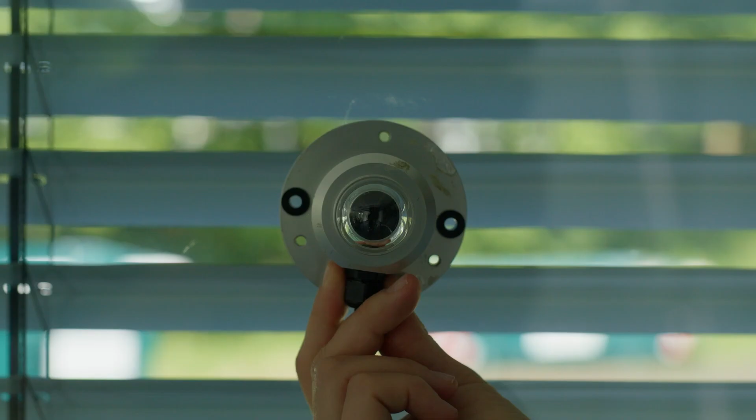Regulation overview. This is lecture I03, regulation overview. It will give an introduction to regulation types and scales of regulation, relevance to facade engineering, and some conclusions.

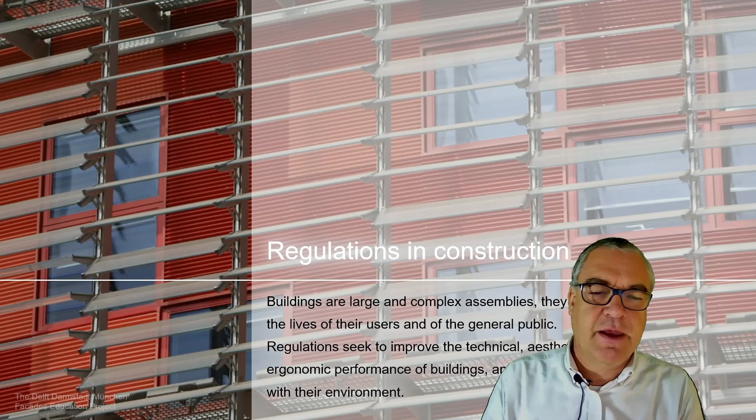Regulations are defined for buildings, which are large and complex assemblies. They shape the lives of their users and the general public. Obviously, they seek to improve the technical, aesthetical, and ergonomic performance of the buildings and their interaction with the environment. We don't want people to die. We don't want buildings that do not function perfectly. We do need to make sure that they're financially feasible and that they make sense energy-wise. And that's why we need regulations.

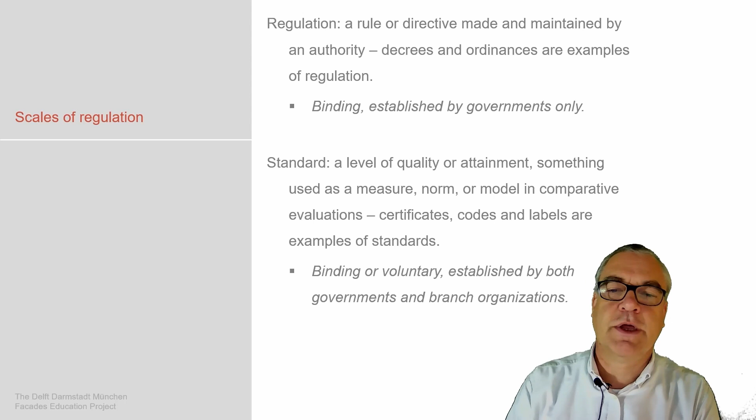These regulations are defined in scales of regulation: regulations, rules, directives made and maintained by authorities, by governments, larger authorities, and then standards, which are more made to measure and norm and organize the quality, which is done in certificates, codes, labels. These are samples for standards, and they're either voluntary or established by governments or branch organizations as a known standard for a structure.

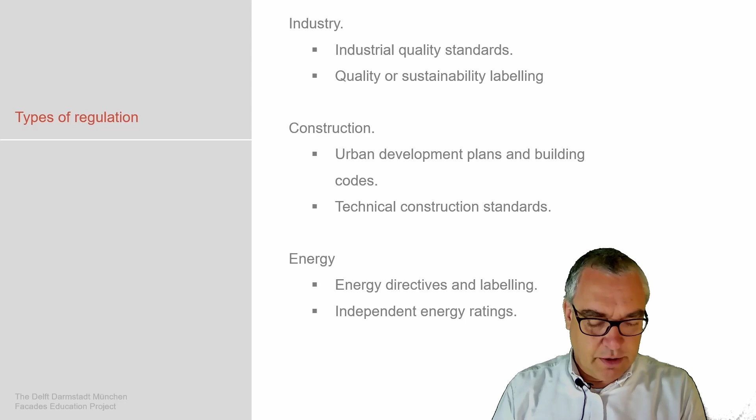We have regulations for industry, like industry quality standards. We have construction definitions like urban development plans, building codes, technical construction standards, and we have energy labeling, energy standards, which are getting important in our built environment. International industry standards like ISO and ASTM establish technical requirements, specify them, and give guidelines to secure qualities of materials, products, processes, services.

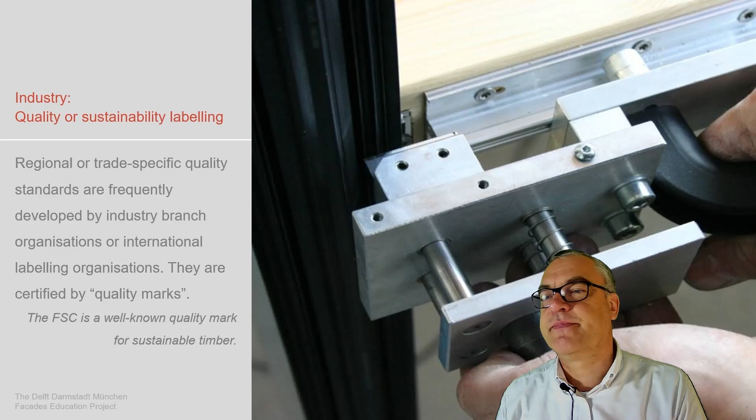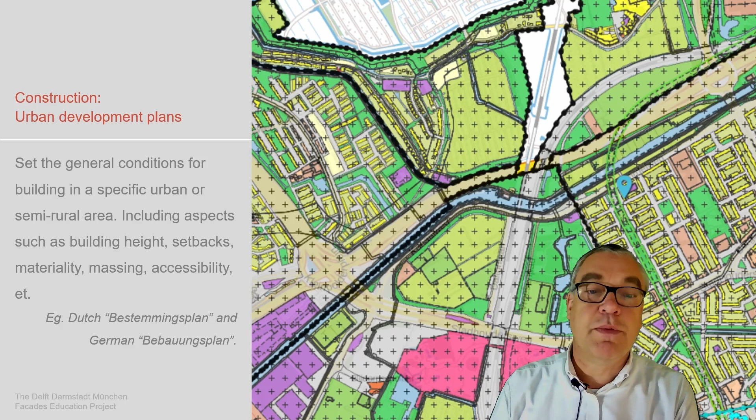Industry quality and sustainability labeling. These are more regional and trade-oriented standards, developed by industry organizations and international labeling organizations. FSC, for example, is a well-known timber trademark standard, and for different materials, services, and product lines these standards exist. Then come the construction definitions, urban development plans, which give a general setup of a certain region, like the Dutch Bestemmingsplan or the German Bebauungsplan. They define what type of building is allowed to function.

Which brings us to the next level, more interesting for facade engineering: the building codes, establishing design and engineering norms for different building typologies, as well as for the interface with other buildings and urban context. They focus on health, safety, and usability. Health in terms of well-being inside, safety in terms of buildings not collapsing, things not falling apart, and usability, the possibility to function. It may be healthy and safe, the building doesn't collapse, but it may vibrate too much, and then you can't use the building. The Dutch Bouwbesluit or the German Bauordnung are sets like this.

Then come the technical details, construction standards, defining the methods for planning construction of building components, for example how to calculate the amount of light or ventilation in rooms. In this drawing taken from Tillmann Klein's PhD, you see all the different DIN norms in this German sample, which give an idea of how to make a construction part of this material, whether the glass, the rubber, or the aluminium profile.

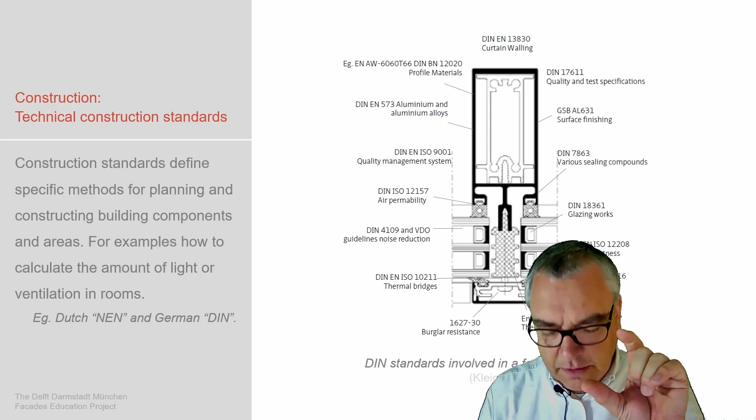The national ones are, for example, the Dutch NEN norms or the German DIN norms, and in the European Union these are being transferred into the Eurocodes, EC norms, which are supposed to take over the national regulations. But as you can imagine, this is a long process, which will take some time to be finalized.

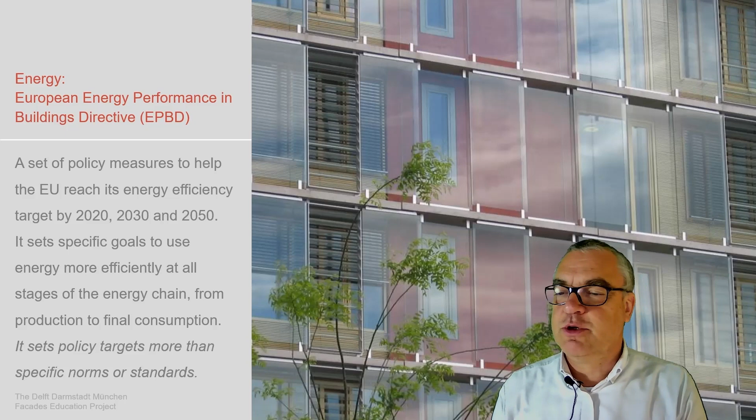Then the energy field: the European Energy Performance of Buildings Directive, the European Union's idea to reach its energy targets by 2020, 2030 and 2050, with an ongoing discussion on this. This defines the global energy goals, which are then transferred into national standards, for example the Energieeinsparverordnung, which is now taken over by the next standard, set up for a certain time. Based on these European norms, national regulations are shaped to reduce the energy impact, and national legislations try to fulfill the European results.

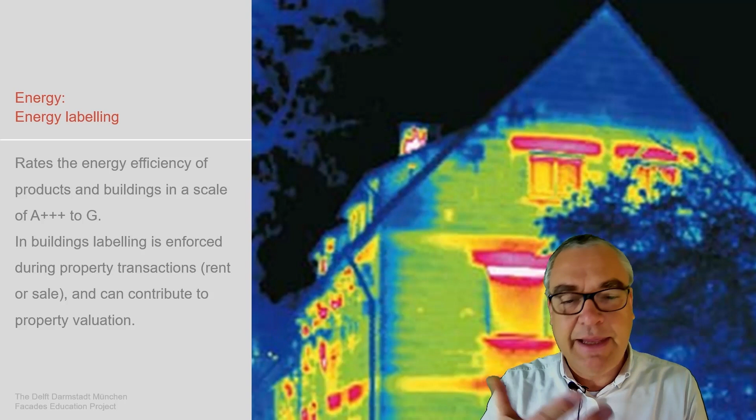Energy labeling is interesting in this aspect. Different products are labeled from A+++ to G, which is very low. Building labeling is enforced during a property transaction, rent or sale. So this is used not only for labeling a product but also the entire building, and it is legally enforced so that people use it, as you are aware if you go through these kinds of processes.

And then there are independent rating agencies, an interesting one as well. Samples are LEED, BREEAM, or DGNB as the German set, and these are voluntary. They're not legally enforced, so you either follow them or you don't, and by that you get certificates which define the energy quality or the global building quality of your building.

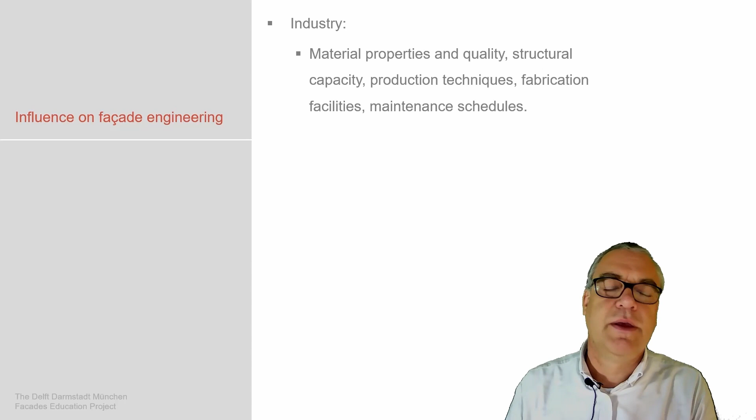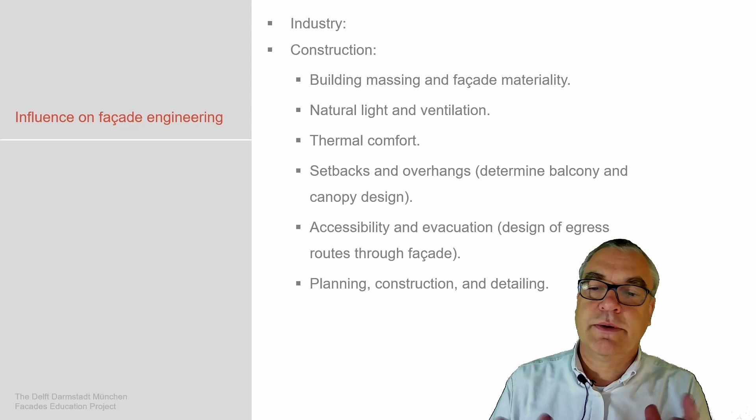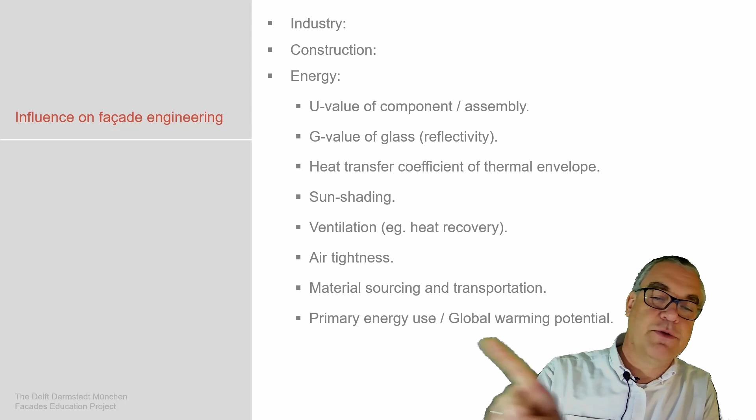So how does this influence facade engineering? Material properties, quality, structural capacity, production technique, fabrication, maintenance schedules as industry-driven aspects in construction. Building materials, natural light, ventilation, thermal comfort. It may also determine setbacks, overhangs like balconies, canopy designs, accessibility, planning, construction and detailing. Then energy: the U value, the G value, heat transfer, sun shading, ventilation, air tightness. Also, as we saw in the building physics lectures, material and transportation, primary energy use, global warming potential, which is also an upcoming impact.

In conclusion, regulation seeks to improve the quality and performance of buildings, the components they are made of, and the process through which they are built. It's regulating how we make facades. Official regulations and binding or non-binding standards are frequently cross-referenced to achieve higher detail or an added focus. All these regulations are constantly redeveloped by larger or smaller committees, nationally or on a European level. Regulations are sensitive to time and location and frequently reviewed.

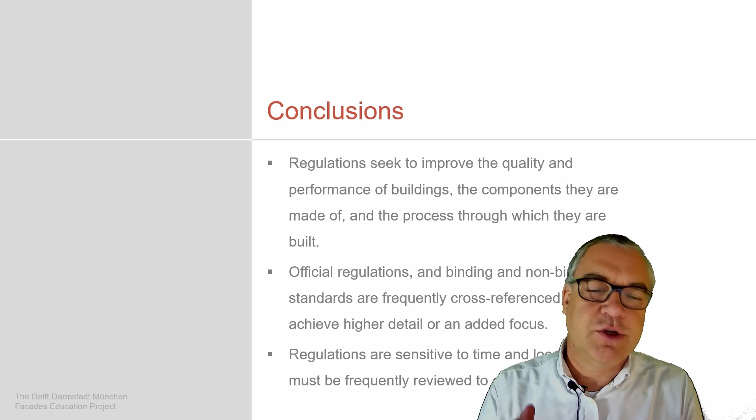They ensure compliance. We use regulations to define what we do and to identify whether we follow a certain set. If you don't follow regulations, you have to prove yourself that you at least reach the goals. It is possible to build beyond regulations, but the processes need to be defined, with quality control and assurance that it's technically feasible. I add this literature, Tillmann Klein's PhD Integral Facade Construction, where we took most of the information from.